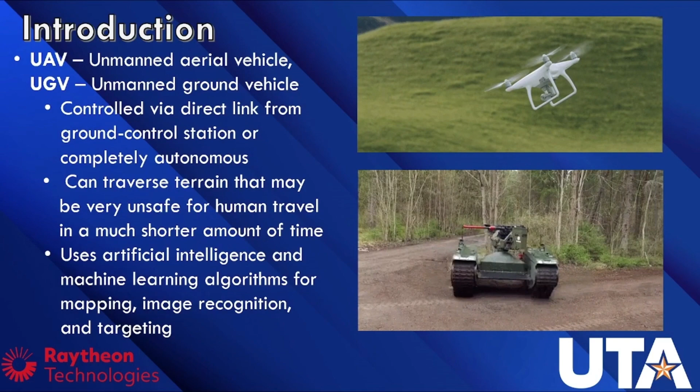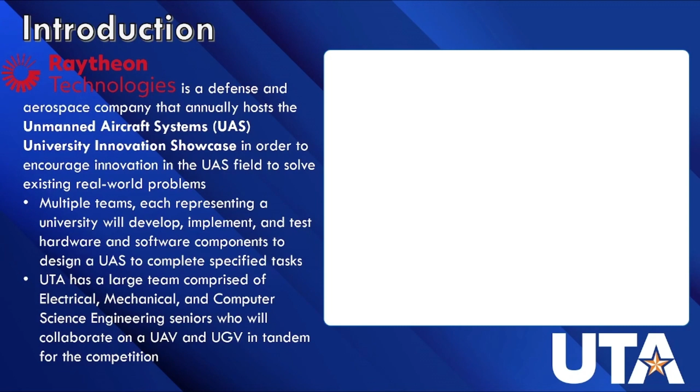Raytheon Technologies is a defense and aerospace company that annually hosts the Unmanned Aircraft Systems, or UAS, University Innovation Showcase in order to encourage innovation in the UAS field and solve existing real-world problems. Multiple teams from different universities develop, implement, and test hardware and software components to design the UAS to complete specified tasks. At UTA, we have a team of electrical engineers, mechanical engineers, and computer science engineers who work together to create both a UAV and a UGV platform in tandem for the competition.

The UAV, or the Seeker, has to fly within field boundaries and identify UGVs by scanning an ArUco marker on top of the ground drones. If the UAV scans its own UGV, it has to ignore it. If the UAV scans a faux UGV, it must tag it with an IR laser. Only one UAV must fly at a time.

It can fly on any path. It has to find and scan the UGVs in any order, and the UAV has the full duration of the task to search and fire upon UGVs. If the UAV finishes early, it is able to try again. So for a task that's 10 minutes long, if the UAV flies in 3 minutes, it's able to try as many times as it likes to get the highest score within that 10-minute block of time.

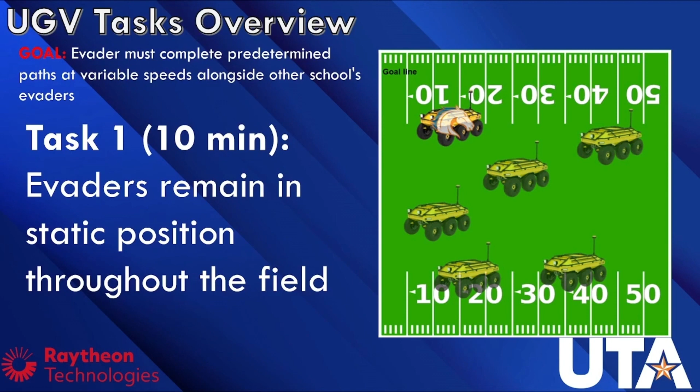For the tasks, the evaders must complete predetermined paths at variable speeds alongside other schools' evaders. For task 1, we have allotted 10 minutes to complete this task. The evaders are placed at random positions in the field and cannot move. The only job the evader has in this task is to detect and transmit when it gets hit.

For task 2, all the evaders start at one side of the field and drive slowly across in a straight line at about 0.17 miles per hour. Again, this task is 10 minutes long. The Seeker has 10 minutes to detect and shoot as many faux evaders as possible.

For task 3, the allotted time is 7 minutes because the evaders are going faster now, at about 0.3 miles per hour. Again, they all start on one side of the field, and at a certain time, depending on which lane they're in, the evader will take a 90-degree right turn, travel 2 feet, make another 90-degree left turn, and finish the path.

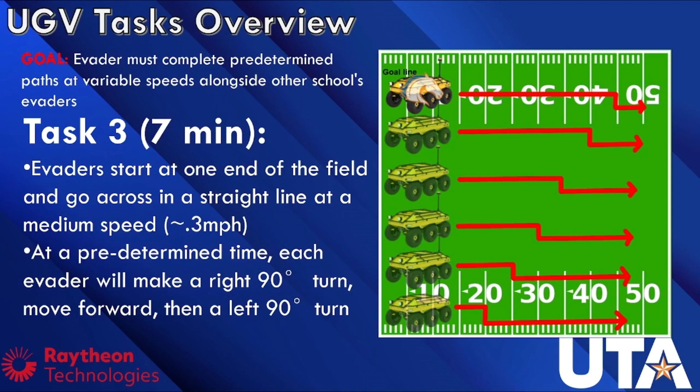For task 4, it's a fast task at only 3 minutes long. The evaders are going fast, at about 0.7 miles per hour. For this task, the evaders will swap lanes with another evader. It'll travel a certain distance, and after a certain amount of time, will make a 90-degree left turn or a 90-degree right turn, travel 24 yards, and then take another turn to finish the task in a straight path.

It's also important to note that on the actual competition day, we did not do tasks 3 and 4 due to time constraints. We only performed tasks 1 and 2.

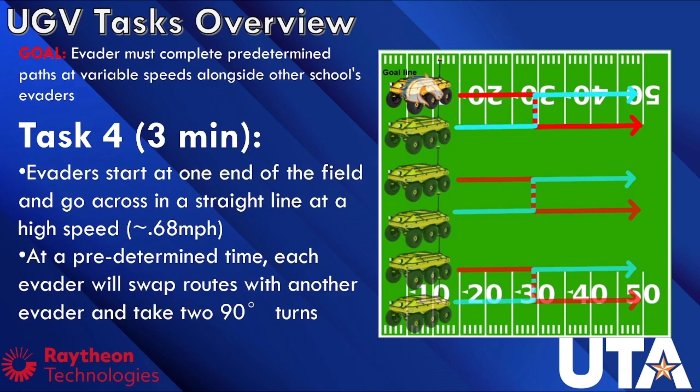For the Seeker, the UAV must be registered with the Federal Aviation Administration, and at least one team member must be an FAA certified drone pilot. Once we registered it, we got a certificate of registration and the license sticker that we pasted on the UAV's chassis.

For constraints, both the Seeker and Evader must be completely autonomous, and they must use the ACE combat system. The Seeker must use the ACE combat laser for firing at the foe evaders, and once it fires, it must also publish a software log saying that it attempted to shoot an evader at this time. For the evader, it has to have a receiver on it. Once it detects a hit, it publishes a log saying it got hit, sounds a buzzer, and lights LEDs to let judges know that it detected a hit. In addition, both drones must remain within the 50 by 50 yard field, and the Seeker must identify the evaders through the ArUco marker shown on the top.

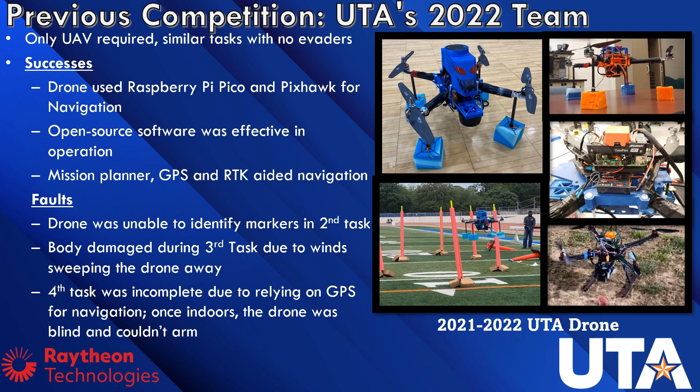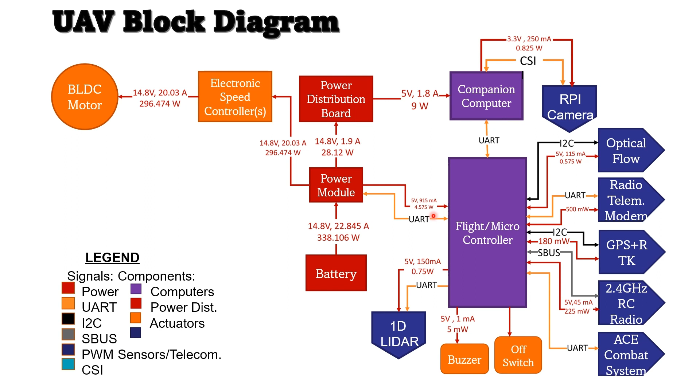And then of course we have the actuators, which are the brushless DC motors, which get power and signal from the electronic speed controllers. Now the ESCs are powered separately from the PDB, but then they get their signal from the flight controller, and that facilitates motion.

And here we have our UGV's block diagram. It's not that much different from the UAV's block diagram. We only have a single motor, and we also have an added servo here that the ESC controls. But beyond that, we have mostly the same components.

We don't have any optical flow on here, instead we just have a 360-degree LiDAR right here. Our battery is also not 8,000 milliamp hour, it's 5,200 milliamp hour instead. It's a 2S instead of a 4S battery, because I don't think any of these components can actually handle anything above the 2S. Everything else here is exactly the same.

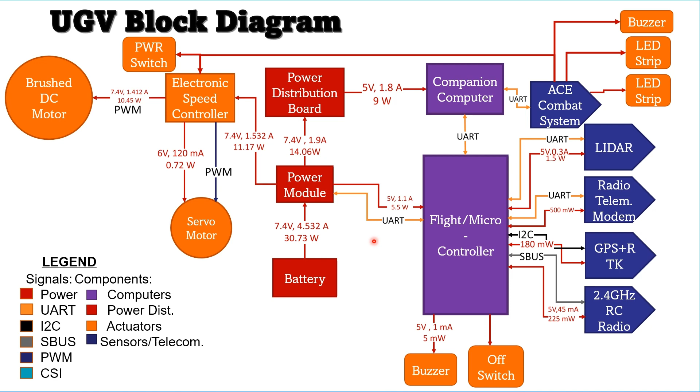Originally, we started with an RC race car, the Traxxas Rustler XL5. We got rid of its default electronics, changed the gear ratio so it would run slower, and printed platforms for all the electronics and an ArUco marker for our version 1 design.

After testing this design, we had it redesigned so it could fit our peripherals better. It also had a dedicated mount and stand for the GPS, and the final design included a protective case fixed on with a strap.

Our UAV's design wasn't built from a base, so we used a test frame provided by the CSE department. Our UAV's prototype was inspired by last year's team's design, but had several key differences. The drone is now much larger than before, which lowered the center of gravity so that while in motion it was more stable. The propellers were also fixed with propeller guards for safety.

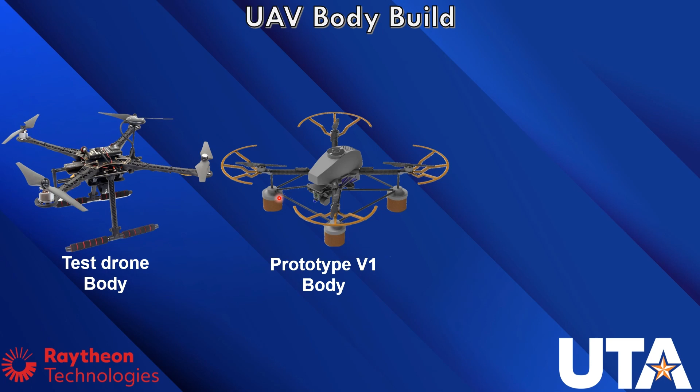These landing cushions used a different material and also had dedicated mounts so they wouldn't break as easily. These mounts also provided inserts for trusses that provide more sturdiness and stability to the overall body design.

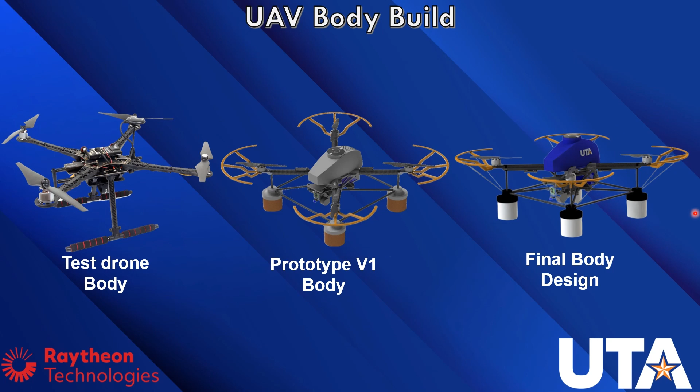The final body design isn't really that much different. Safety wire was added because during landing, these propeller guards would have upward motion and touch the propellers, getting cut off. This prevented that from happening. The chassis also had minor adjustments so all the components could fit better.

An important part of our design was the extended Kalman filter, or EKF, which we use to estimate vehicle position, velocity, and orientation. This is based on our GPS data, compass data from both the Pixhawk and the GPS, and accelerometer and gyroscope data from the Pixhawk's internal inertial measurement units, or IMUs.

This algorithm is already part of Mission Planner, so we just had to set everything up in the parameters so it could use the GPS and make sure the EKF values are acceptable. If values are too high or abnormal, Mission Planner has internal sensors that monitor that - just click the EKF status icon on the home screen.

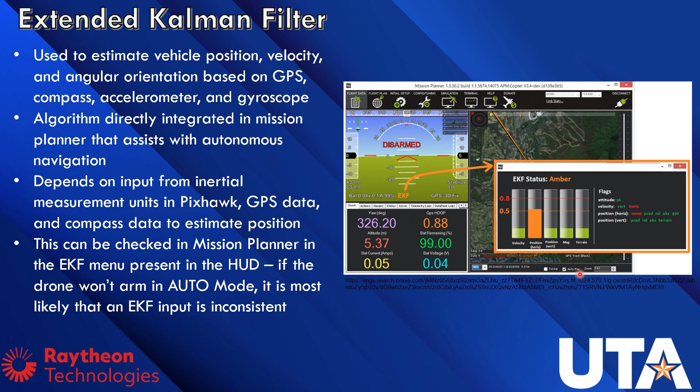Some tips and lessons learned for the body design and electronics: something that might get better performance is to increase the number of motors on the drone, like a hexacopter, or if you really want to get crazy, an octocopter. You can go a lot faster with it and be more stable.

Make sure you design the body for the desired length of wires to reduce electromagnetic interference between components. That was actually a big thing that prevented us from using the GPS correctly during our testing and development phase. Once we reduced the interference by adjusting the wiring, the GPS fared a lot better.

Another thing you can do is twist the wires. This will cancel out emissions from equal and opposite wire signals, like 5V and ground for a peripheral, or RX and TX, for example.

Another thing that might help is having retractable landing gear for the flight - it might give a better center of gravity and reduce drag. We fared well enough without it; it's just something one of the competitors had, so it's not a top priority. And of course, make sure your GPS module has RTK.

Now for our testing of the components, starting with the ACE Combat system. Our electronic speed controller goes to the ACE Combat to power it, which gives a signal output to the motor upon being hit with an IR signal. Upon being hit, a PWM signal is sent to the Raspberry Pi to send a message to the IRC server, which I'll show in a later slide. It also flashes the LEDs, sounds a buzzer, and spins the motors, which we can see in this video.

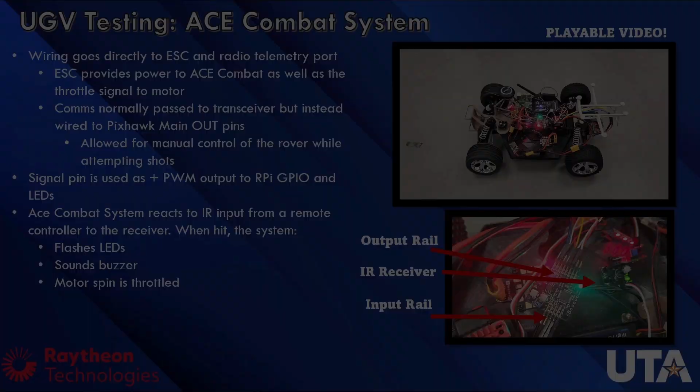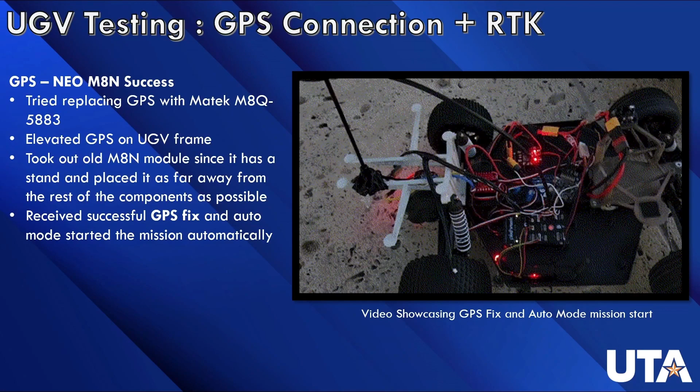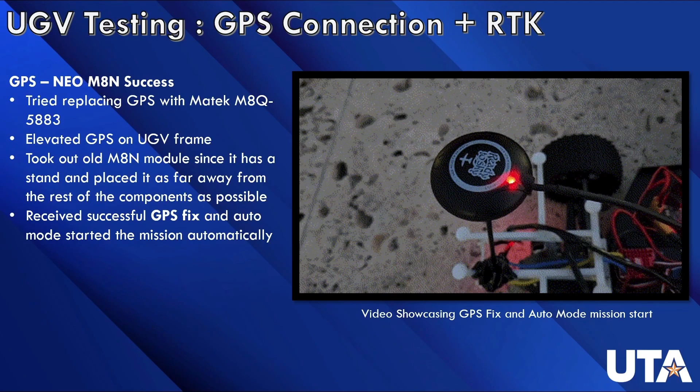For autonomous navigation, we had to ensure the GPS was able to get a fix. In the beginning, the GPS wasn't getting a fix at all, and if it did, it was a very low signal. We went through a couple of GPS modules, and upon elevating the component from the frame, we found a significant increase. This is because of EMI, especially from our power cables - once we elevated this, we obtained a decent signal and were able to run missions autonomously.

And in case the competition was held indoors, we also looked at implementing ROS, Robot Operating System, and SLAM, Simultaneous Localization and Mapping, to navigate without a GPS connection. This would have been done with the A2 LiDAR and the Raspberry Pi for processing, but ultimately the competition was held outdoors.

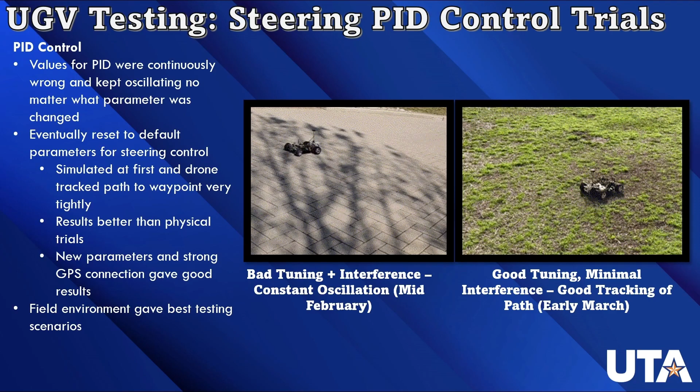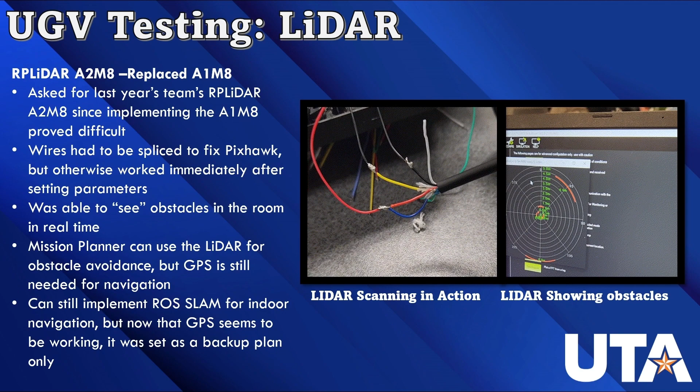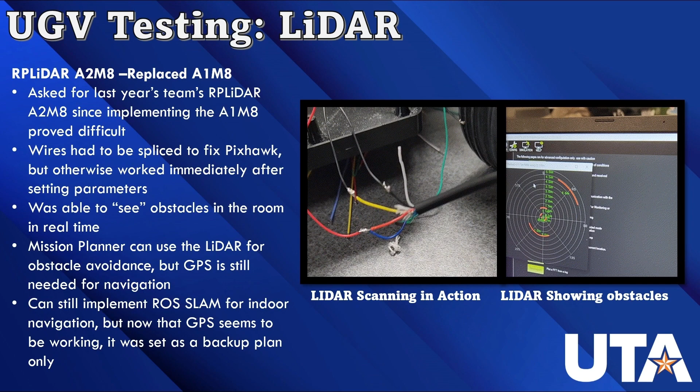And this is the LiDAR we would use for indoor navigation. We can see that we have obstacles that you can see in Mission Planner in the right image. This integrated a lot better with our Pixhawk flight controller, and it was also easy to use rather than the A1, which gave us a lot of hardware problems.

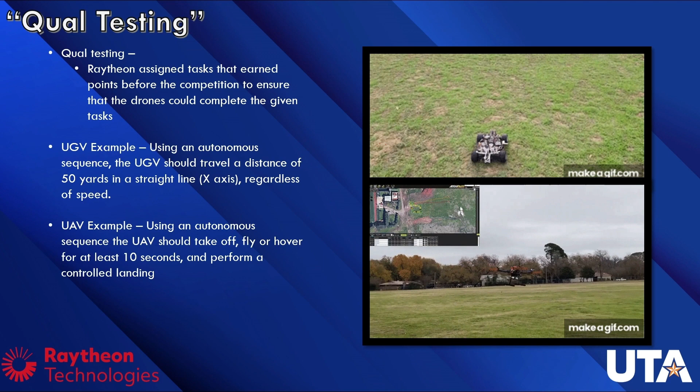And for hardware, we learned to move power lines away from our GPS and label connections for orientation of our wires, and also organize the layout of the drone, especially for component mounting and wires.

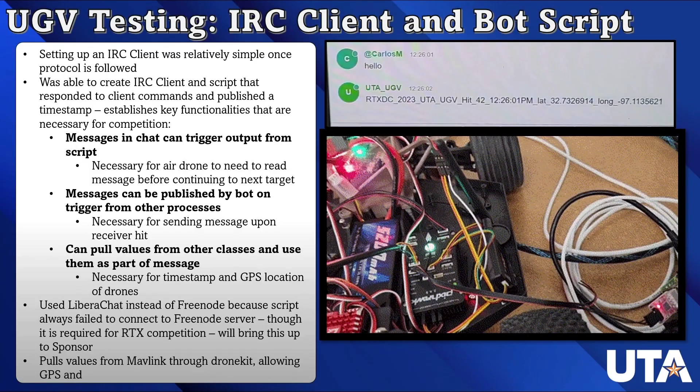For software, adjustment of the servo trim saved a lot of time since PID tuning is a lot of trial and error. Also simulating tasks before field testing, and ensure that the waypoint radius is set big enough, otherwise the drone may overshoot the waypoints.

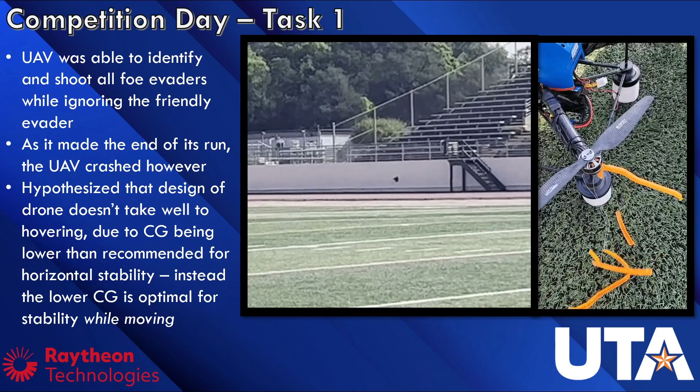However, at the end of our run, the UAV fell out of the sky, and there's several theories we have for it. The first one is that the center of gravity of the drone didn't warrant hovering very well. Another possibility was that the Raspberry Pi became unplugged right at the end, causing it to crash.

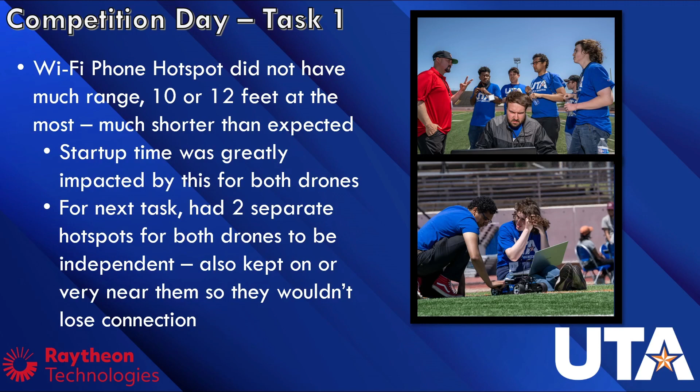Additional problems came with the hotspot. We needed the hotspot to connect to the UAV as well as the UGV. However, range became a problem as the UAV was flying around. Later, we used 2 different hotspots, and we followed the UAV around in the field to ensure that it stayed connected.

For task 2, our UGV initially got off to a rough start. It had trouble mounting, as well as it would continually veer off and not stay in line. After resetting it, however, we managed to stay on the line and drive down the path at the desired speed of 0.17 miles per hour, and we reached the other side.

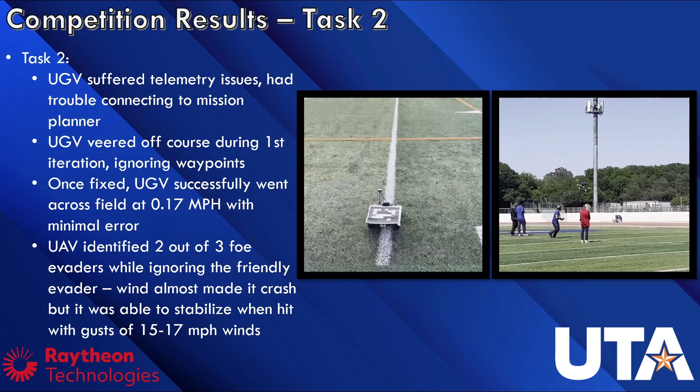The UAV managed to identify 2 out of 3 enemy drones and ignored the friendly drone. We missed the third one because one of the other competitors' UGVs sped across the field much faster than anticipated, so by the time our UAV reached that section of the field where the other drone was, it was no longer there. It was on the other side of the field.

In the end, we ultimately won first place, second place went to UT Austin, and third place went to UT El Paso, and the rest were honorable mentions, not ranked in any particular order. The main thing that set us apart was our qualification testing that we did prior to the event. We racked up a lot of bonus points for doing this, and it really pushed us ahead.

Additionally, we started testing right when we could, as soon as both the UGV and UAV were ready to fly and register hits. And we used easy, friendly parts which could be swapped out whenever something went wrong, which greatly reduced the time of having to fix any particular problem we ran into. And that concludes our presentation of our senior design project.